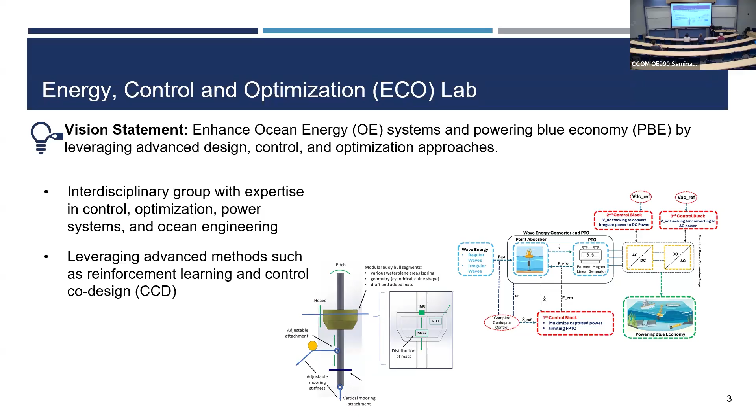That's an interdisciplinary group. We have different expertise from ocean engineering, electrical engineering, and mechanical engineering, and that's all we need for improving this kind of system. We're using advanced approaches like reinforcement learning, control co-design, and machine learning algorithms to solve the issues that we have with these kinds of systems.

If you're familiar with ocean energy systems or powering blue economy applications, you've probably seen these pictures, but for those who are new to this concept, we have a large amount of energy that can be harnessed from the ocean. It can include different types like wave, ocean currents, and ocean tidal energy. This amount of energy can power over 80% of the electrical demand from the US, so we're speaking about a large amount of energy accessible in the water.

One of the most important applications we can imagine for using this power is powering blue economy applications. Using this power is challenging because it's difficult to transfer it from the ocean to the shore, and there are discussions about that. But one of the most important applications we can target is using this power for applications we already have in the ocean, because we have the same issue transferring power from the shore to those applications.

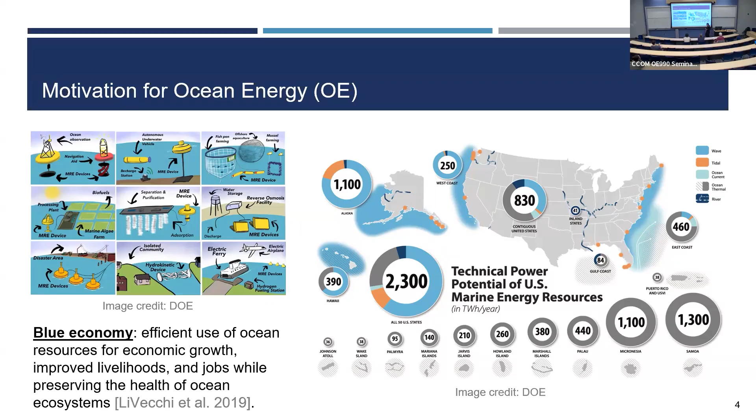So those applications include aquaculture farms, ocean observation, water desalination, and other applications that fall under powering blue economy applications, enabling sustainable use of the ocean. We want to target those specific applications and use the power we already have in the ocean to power them. So what are the current challenges that we have here?

For ocean energy systems, the first challenge is a very long and costly procedure for designing the system. To reach the optimal system, you can see from the history of other systems, like wind turbines, that it's a very long procedure to get an optimal design. So how can we make it more efficient? We have different ways—we can use control co-design, which is co-designing the control and the design of the system together, considering different parts together and using advanced approaches to get an efficient design.

So we already tested this in different systems, so we can just borrow those ideas and test this for the ocean energy systems. One of the issues for this system is the discussion on the unsuitability of these ocean energy systems for the final application.

By final application, we're targeting powering blue economy applications. So why don't we take one step back and see these applications from the beginning? When we want to design this system, applications like aquaculture farms are new in the US, so we can take one step back and see these applications.

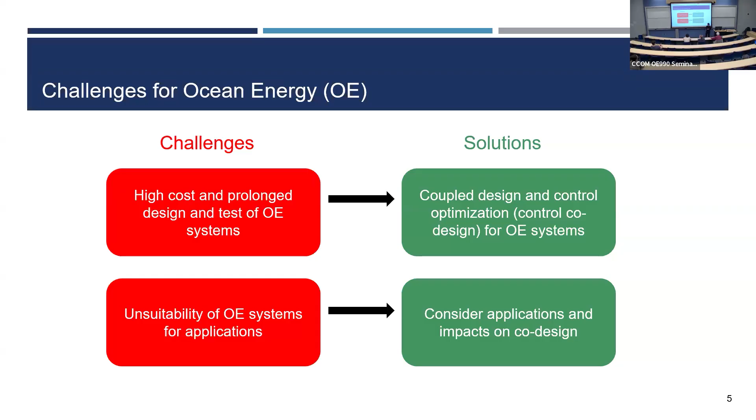So two main thrusts I want to cover in today's seminar. The first thrust would be control co-design for ocean energy systems, and I'll specifically speak about the marine current turbine and wave energy converter.

Thanks to a very nice figure from PNNL, the second thrust would be for PBE applications, specifically the aquaculture farm, and how to co-design the ocean energy systems with this application. Starting with the first one, the first question we need to answer is, what is control co-design?

To understand the concept of control co-design, we first need to understand the difference between control co-design and the traditional design that we already have for different systems.

In the traditional design, you can see that we start in a sequential process. We start from aerodynamics, mechanical design, electrical design, electronics, and finally control. So control would be the final step.

What happens if we have this procedure? The control should match all the features we have from the previous steps, so none of them would consider the requirements that control has. So what would be the solution for this?

We can consider all these steps together at the beginning. So we can consider control and design together at the beginning. And if we are considering the control requirements and the mechanical design together, it would be the interdisciplinary field that we're interested in.

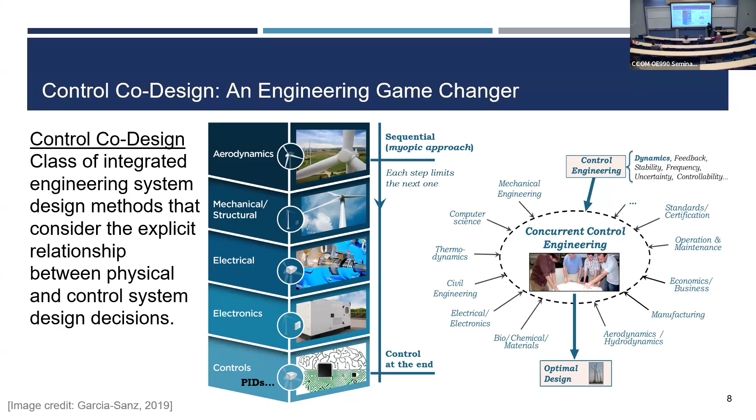This approach was first introduced and used for airplanes, so we just borrow that idea. It will be very suitable for electromechanical systems like wind turbines, marine hydrokinetic devices, and airborne wind energy systems are a good target for using this approach, because all of these systems are new systems.

So we can use this control co-design concept before going through prototyping and incurring so much cost and time, rather than getting back to the first step to improve the design. Doing this control co-design lets us see the improvement in the design at the beginning.

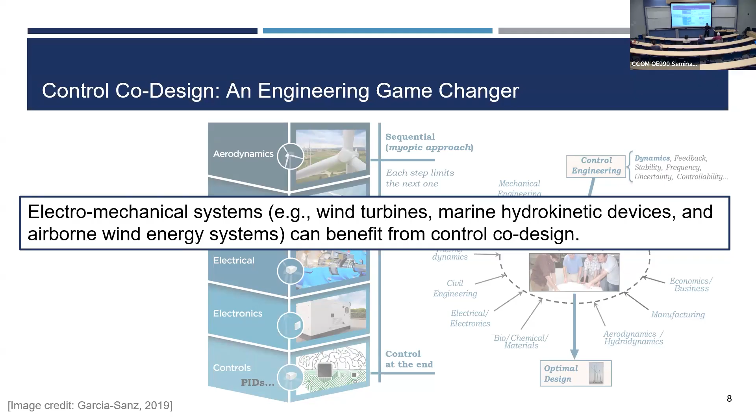So for any system, and here we're interested in ocean energy systems, what could be the major steps when we want to solve the control co-design problem? The first step is understanding what our system is.

It's very important with any new system that you're working with, you need to understand, identify the system, and know what the system is doing. The second step would be mechanical design.

It doesn't mean that you need to fully design the complete system, design the controller, and go to prototyping, but it means that we need to have a first, basic design for the system, because this basic design is what we use in the control co-design.

In the basic design, we need to consider low fidelity for the design. Why do we need this? Because we want to play with the design variables in the design and change these with the control requirements. The next step would be understanding what the control requirements are for our system.

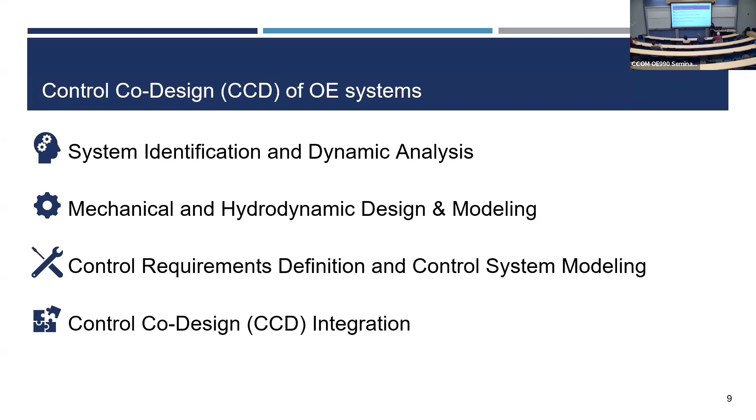Which control do we need for our system, and what are the main requirements for them? After that, we can couple these two together and target the control co-design. We are doing the control co-design, but for that, we need to know what would happen in the design of the system and in the control of the system. I'll first give you an example from my PhD.

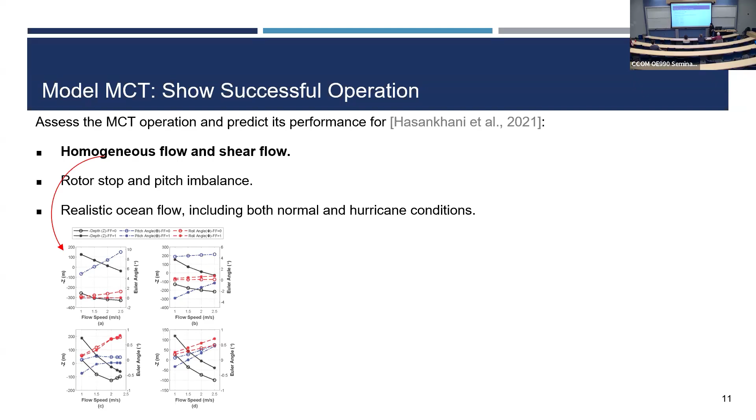The next part would be some faulty conditions. If we have the rotor stop, or pitch imbalance, what would happen to our system? Can our system resist these, or would something very unusual happen? We see that our system can resist these faults.

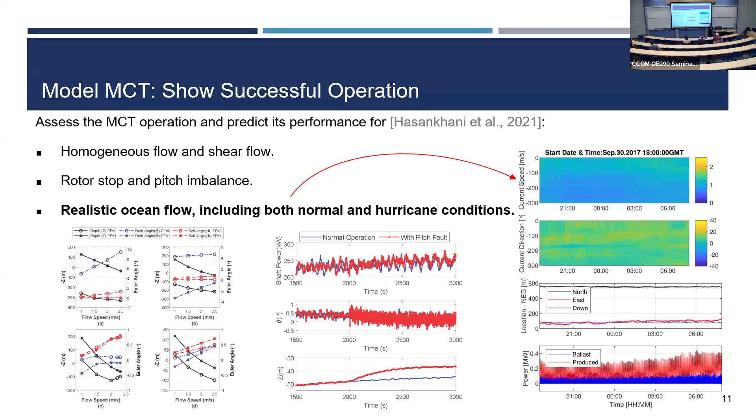And finally, seeing the operation of the system for real oceanic velocities—for normal conditions and hurricane conditions—seeing the power output from this system and the location of the system. So we understood that the first, basic design for this system is working very well in different conditions.

With this intro, we have a very detailed and nonlinear model for this system. If we want to use that complicated nonlinear model, I didn't show you the equations, but if you're interested, we can discuss that. So if we want to use that complicated model, we can do that, but we are targeting the control co-design.

Control co-design wants to place both the control and design of the system together. If we want to put both of them in a very detailed approach together, it would be very time consuming. So if we can linearize or simplify the design of the system or the control part, we can make this process faster.

So the first attempt at linearizing the system: we get the linear model for the vertical movement and the linear model for the power generation from the system. Then we justify those models against the nonlinear model and see that the precision is enough for our case.

For the linear model of net power, we have the net power from the system, which I already explained. We have the power production, coming from the ocean current velocity, and two terms for power consumption: power to hold the operating depth and power to change the operating depth. So we need to see the balance between these three terms to find the maximum power we can get from this system.

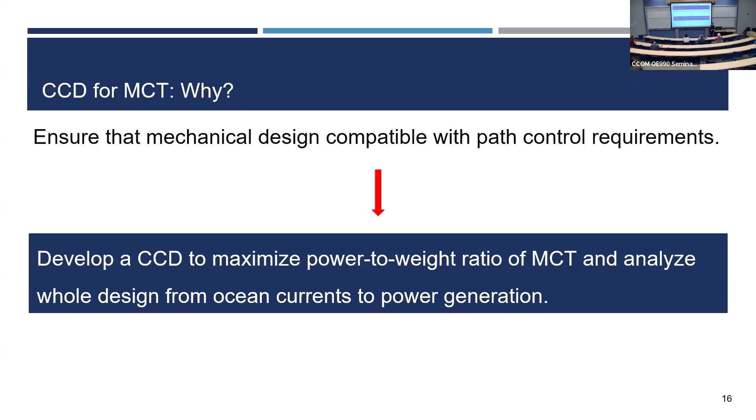Since the beginning, we designed a system that is capable of harnessing the maximum power while following those optimal paths. So we use the control co-design to design the system and see how this control co-design changed the basic design we had since the beginning.

For this, we can target changing different design variables in the system, but for my case I just targeted three: the rotor of the system, the buoyancy tank, and the generator. These are the three main design variables I targeted to see how changing them would change the design of the system, and how the power-to-weight ratio, which is our objective, would be affected.

So the rotor is very important for generating the power. The buoyancy tank size would define how much our system is moving in the vertical position, and then the generator shows us the rated power that we can get from this system.

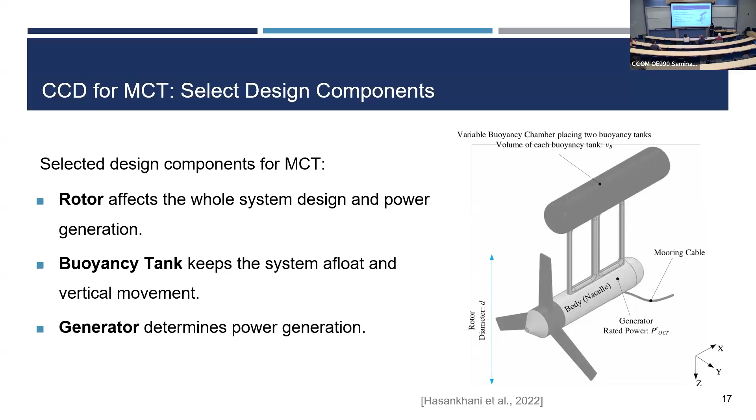So with this, just choosing these three variables, now we want to define the control co-design approach. The control co-design approach should oversee the objectives from the design of the system and then the objectives from the control of the system. So we have two levels here. We need to combine these two levels. How to combine these two levels? It's the art that we have here for the optimization.

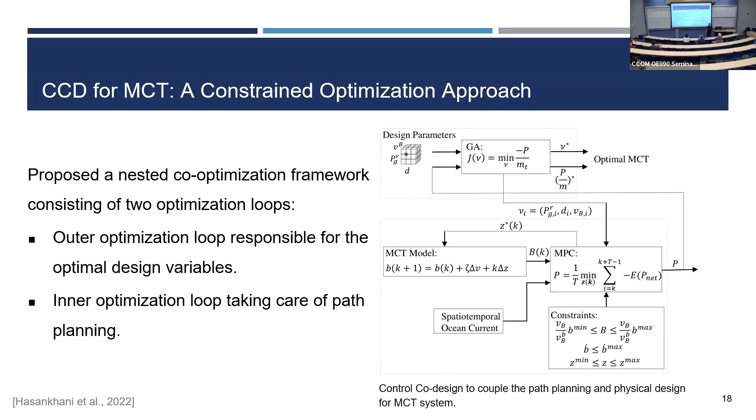In my problem, I define this framework to consider the outer optimization loop, which is for the design of the system, and then the inner optimization loop, which is for the path control of the system. So we are considering two different optimization loops. You are seeing that the problem is getting more and more complicated, and now you can see why we need to simplify the model wherever we can.

So the main problem for the outer optimization would be maximizing the power to weight ratio, while we already have the path control problem as the inner one. And then we are changing different design variables here, which are the rotor, generator, and variable buoyancy tank size. So the problem here is maximizing power to weight ratio, and we need to see if we are changing the rotor, generator, and variable buoyancy tank size, how the mass of the system would change. By changing all these parameters, how the mass would change, and we need to formulate them.

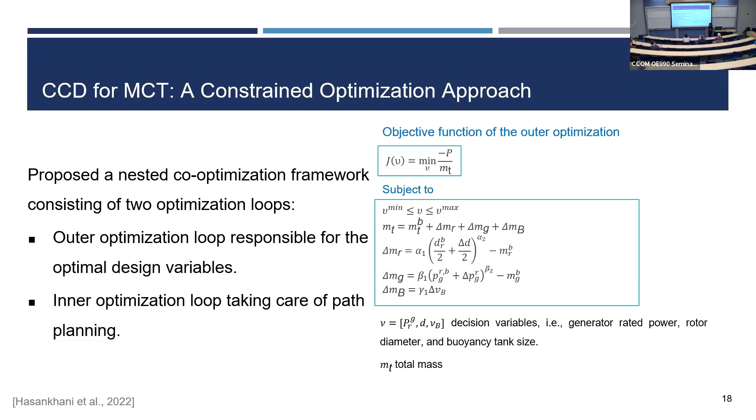So after formulating the problem, we want to see what results we get from here. The first case we show here is the base design. We only apply the path control to the base design that we have since the beginning, and we see what is the value for the power to weight ratio.

Then we tested this with sensitivity analysis. We understood that the rotor diameter is the dominant design variable here. So the second case is showing if we only target the control co-design for the rotor diameter, what would be the changes? You can see that the rotor diameter size is increased, and you are seeing around 16% increase in the power to weight ratio.

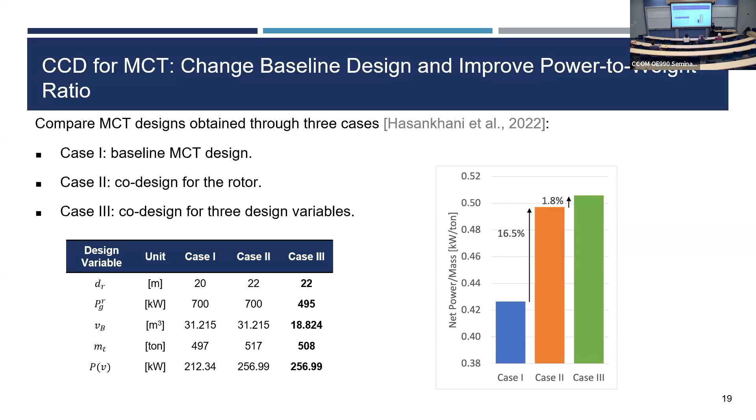And then the final case is changing all of the design variables, rotor diameter, generator size, and variable buoyancy tank size, and seeing how this impacts the power to weight ratio. You are seeing around 18% increase compared to the first case. Now we can understand how important it is to apply this control co-design approach for this kind of system before going through prototyping and before spending so much time and money on this system.

So with this intro, what is happening now in Ecolab? What is happening now in our lab? We are working on control co-design, coupled control, optimization, and design for the wave energy converter.

So again, we need to understand we are working right now with the point absorber type of wave energy converter. We need to first understand what these systems are doing, and then we need to understand another part for this system, which is power takeoff technologies to harness the power from these systems. And then we need to have the mechanical design with high fidelity because we want to play with them in the control co-design, and then understand the control requirements from the system.

For example, I show you here that for this system we need three control blocks. The first control block is for maximizing the capture power, and then limiting the force from the PTO, and then the two other blocks which are related to just controlling the power output from this system. So we need to consider these control requirements from the beginning in control co-design for this system.

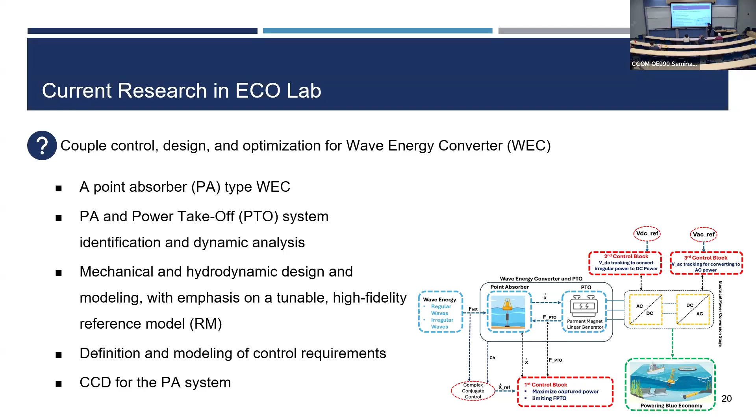So with this, I want to switch gears and go through the second thrust, which is co-design of ocean energy systems for powering blue economy applications, specifically aquaculture farms.

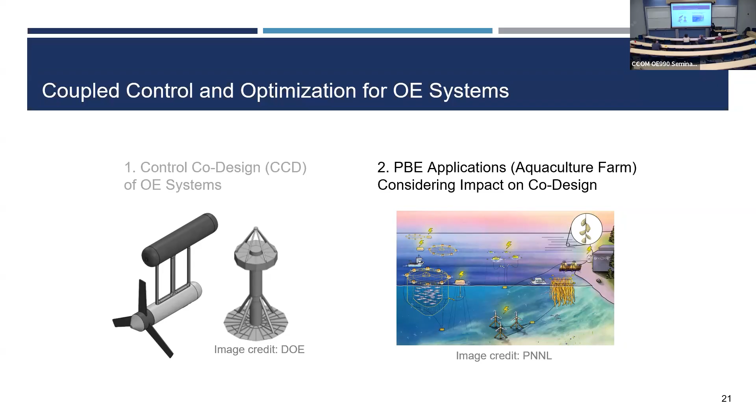So the first thing here is clarifying: is this system, a wave energy converter, a good option, and can it power the aquaculture farm? The first thing is we are going further offshore for the aquaculture farm because there is high competition in the near shore zones, and we want to avoid those competitions.

Also, by going further offshore, we can increase the amount of production from the aquaculture farm. The current energy need from the offshore aquaculture farm is met by diesel generator. You may ask, what is the energy demand from the aquaculture farm?

Here's an example. For lighting, for feeding, and for other applications, we need some power for the aquaculture farm. For this example aquaculture farm, we have around 2,800 megawatt hours for 10,000 units of fish production.

With this amount, we can get an initial guess and compare it with the annual energy production from a sample wave energy converter. Reference Model 3 is a well-known wave energy converter designed by the Department of Energy, and the targeted annual energy production for a specific location they evaluated was estimated around 700 megawatt hours.

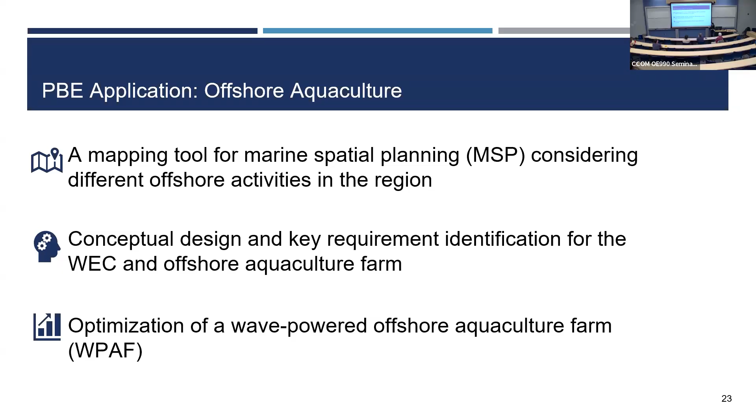And then, conceptual design of the system: what are the main requirements from the aquaculture farm, what are the main requirements from the wave energy converters? Because these are two separate systems, we need to combine them together. And finally, optimize the wave-powered offshore aquaculture farm together as a single system.

I'll give you some results from my postdoc research, and then go back to the research we are now doing in the ECO Lab. The first task, as mentioned, is to select the deployment location for the wave-powered aquaculture farm.

To do that, we need to consider different factors. The first one is environmental factors, important for both fish and the wave energy converter. We need to consider what's required for the fish: temperature, salinity, dissolved oxygen, and current speed, and what's required for the wave energy converter: significant wave height and wave energy period.

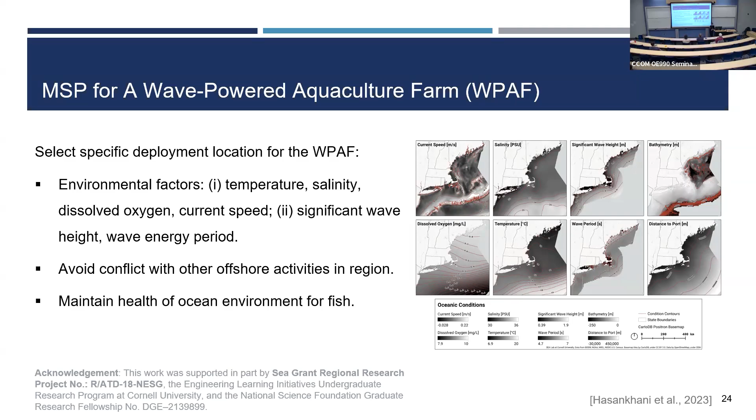We also want to avoid conflicts with other activities already happening in this area, and finally, we want to maintain the ocean health for the fish. So we want to place the aquaculture farm in a location where we're sure we can get production from.

After addressing the first part, the mapping tool and understanding what locations are available for this system, we want to start with the conceptual design. What are the main components for the system? We have two main components: wave energy converter and aquaculture farm.

So for the wave energy converter, what are our targets? We want minimum cost, high reliability, and because we're targeting the offshore aquaculture farm, we need a near constant power supply.

For the aquaculture farm, we again want minimum cost and maximum fish production from the system. So what are the components here? The wave energy converter needs us to consider the energy generated from the system, and we need to model the cost of the system.

For the aquaculture farm, we have net pen, feed barge, fish type, and carrying capacity. For the net pen, it's important to know the geometry of the system, because if we know the geometry we're designing, we want to see how the design would change, along with the materials we're using, the energy required, and the cost required for the net pen. For the feed barge, we need to know how much energy is required and what the cost is for the system.

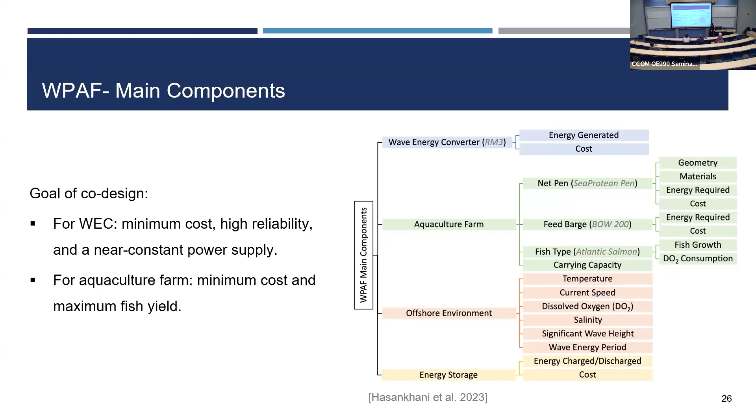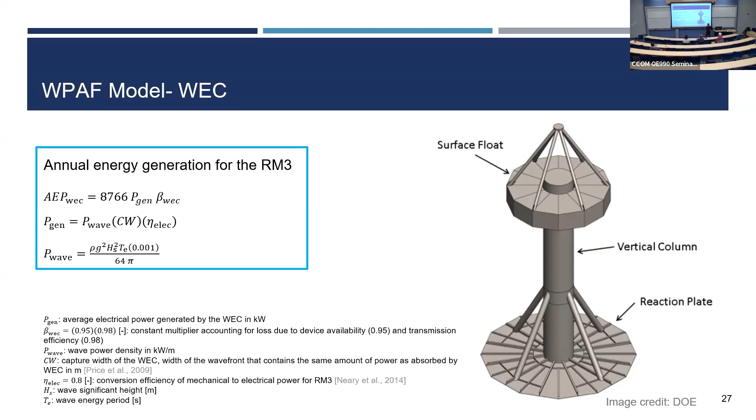So you already see we have a very complicated model here. We need to model different parts and see the relation, the coupling between these different parts together. Just to give you some ideas, I don't want to go over the equations in detail. The energy model for reference model 3 that we worked on previously gave us the annual energy production, the power generation based on the wave height and wave period that we have.

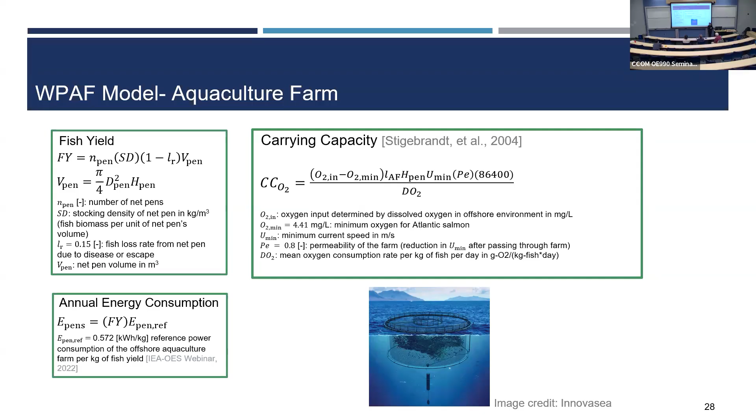For the net pens, we need to understand the fish yield for the system based on the stocking density we put in, what is the annual energy consumption, and what is the carrying capacity, which gives us the limit on the amount of fish we're putting in the system. After modeling all these components together—and I didn't go over the rest of the components since it's ongoing research—we need to model the objective function.

Again, we're solving an optimization problem, always solving an optimization problem—right now for minimizing the total cost of the system relative to fish yield, seeing what the cost is based on the fish yield we get from the system.

The constraints we considered in the first try were the power supply, making sure it's enough to power the aquaculture farm; the fish yield, making sure the amount of fish stays within the range of carrying capacity; and also putting some ranges on the net pen geometry.

With this, we have the design variables: the capture width for the wave energy converter, giving us some idea of the physical design of the system, and also the diameter and height of the aquaculture farm, and then the stocking density.

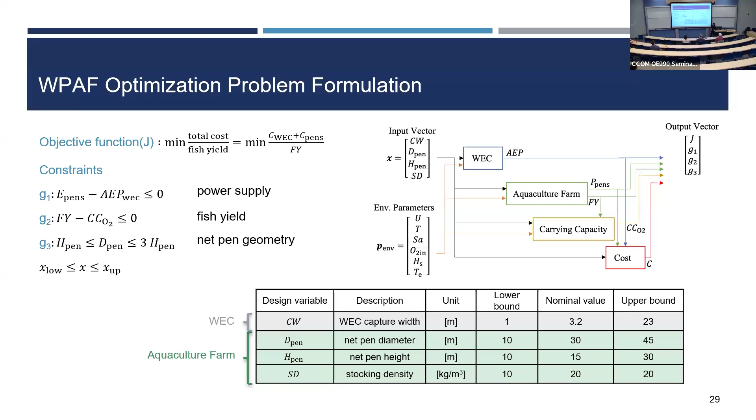These were the first trial results with this complicated model. So the first results we get from here—without going over too much detail—we understood that the optimal designs we expect from this system can differ, but all of them show that the capture width from the wave energy converter and the pen volume should have a ratio of 0.003. We also found an optimal stocking density of 20 kilograms of fish per volume.

And the optimal cost per fish yield was $6.4 per kilogram of fish. But this model was not complete because we didn't go over the details for all the components. It was only the first trial.

After seeing this, we understood that we need to go over the details for all the wave energy converters, all the energy storage system, to have better results and a better cost estimation. This is ongoing work. We are working on that to see what would be the complete model for the cost of this system, and comparing this cost with the cost from the diesel generator option that we have.

So it just highlights for us that we are required to optimize the design and location simultaneously, and also we need to have a detailed design from the wave energy converter and aquaculture farm together.

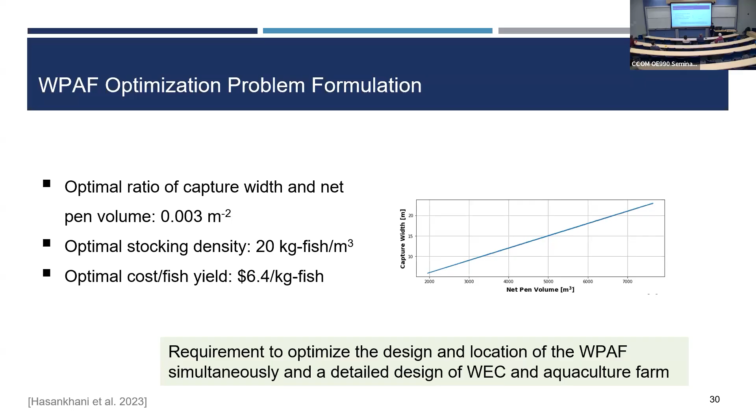So now what is happening in the ECO Lab? The second part: we need to design a wave energy converter reference model which can be useful. Now we know that we need a detailed design for the wave energy converter. So why don't we have a reference model wave energy converter targeted for PBE applications?

So this reference model needs to be high fidelity, so we can play with it and make it suitable for different PBE applications. Our first target is the offshore aquaculture farm application.

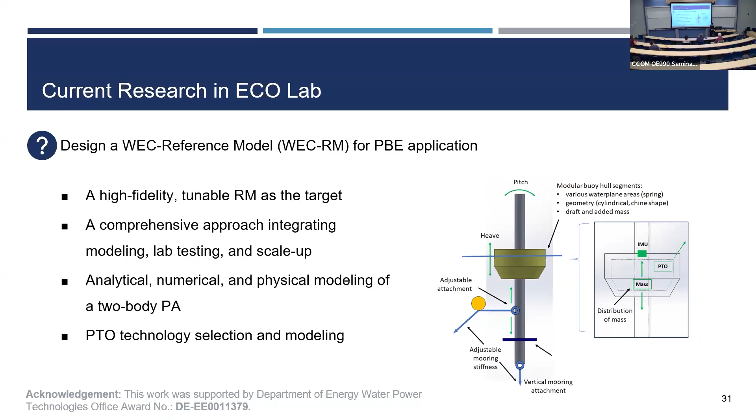So the PTO technology for these systems is very important, as I mentioned. We started with the two-body point absorber, and then we need to understand what are the power takeoff technologies for this system. To do this, we need to combine the simulation and the design for lab testing together.

With this high fidelity model, if we want to do the modeling, test it in the wave tank, and then go over to field testing, we see how this design changes and how we should justify this for the offshore aquaculture farm.

And all this information helps us understand how to design an optimal wave-powered aquaculture farm together.

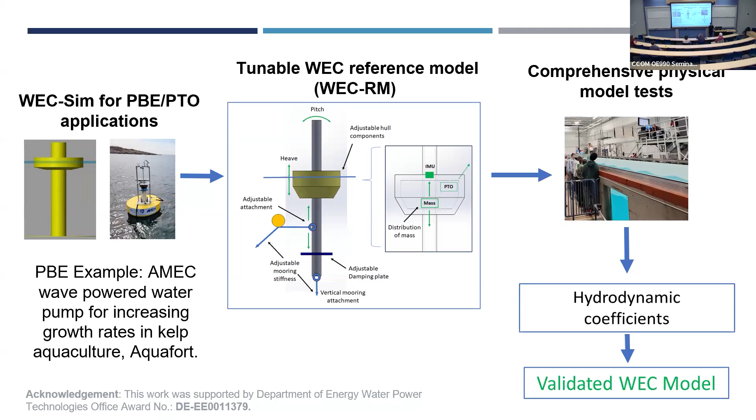So to give you some feeling on that and an intro to the research we are doing: the wave energy converter types we're having, because I didn't speak about this up to now, we are targeting point absorber, oscillating water column, and oscillating surge wave converter. And then we have 4 different types of power takeoff technologies.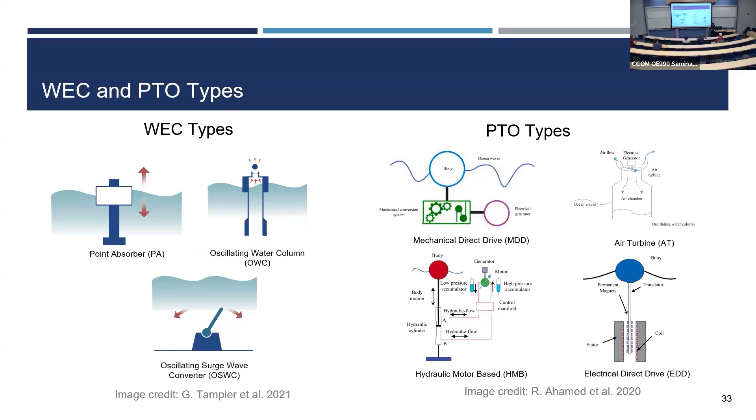For example, for the offshore aquaculture farm, we understand that the oscillating water column works very well with the AT PTO options. And we see that the point absorber is probably the best choice here, and it can work with mechanical direct drive, electrical direct drive, and hydraulic based systems.

When we want to choose them, we need to see the considerations we have: what is the efficiency for this system, what are the considerations here, and just choose the right system for our type.

And then the final choice is not good, because if we are speaking about the offshore aquaculture farm, if we are going further offshore, this option is not very well suited for our case.

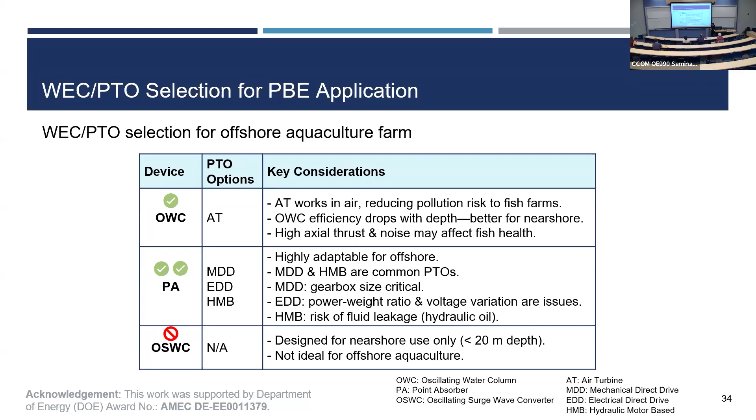So with this approach, what I have in mind and what I'm seeing as research for leveraging different control, optimization, and design perspectives is designing a toolbox for the ECO Lab, targeting different approaches for control, design, optimization, co-design, control co-design, and multidisciplinary optimization.

So do we need to use all of them always? No, it's up to the problem. You are already seeing two different problems: one was the design of the ocean energy system, and one was the design of the wave-powered aquaculture farm.

So we have different oceanic data here for the ocean current velocity, significant wave height, wave energy period, and any oceanic data that we have.

The quantifiable metrics - economic, security, technical, or environmental. And then the disciplines that we have - control, electrical, mechanical design, ocean engineering - any disciplines that we are interested in.

So then when we are targeting a specific problem, for example, we want to see the new optimal design for ocean energy systems, the wave energy converter, we need to just use control, design, and control co-design. This gives us the ability to have a good design for this system.

When we are targeting an existing system, the reference model three, and we want to improve the design of that one, control co-design and multidisciplinary design optimization can help us. When we are just considering the optimal array for the system, the optimization task would be enough, and they are very close to each other. We can use these approaches in different problems.

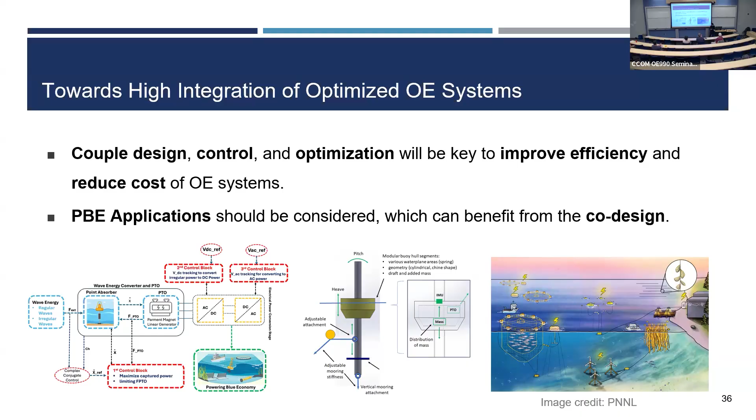For PBE applications, if we need to justify that these ocean energy systems are good for PBE applications, we need to take one step back and design the system specifically for those applications. So we need to use the co-design perspective and all the optimization techniques that we discussed. Thanks for your attention.

Thank you so much, that was really great. I'd like to open for questions if anyone has any questions for this speaker. One question I have is, for your model, how are you obtaining information about the wave velocities, and how much noise is creeping into that model that could affect the control system, and how you deal with that.

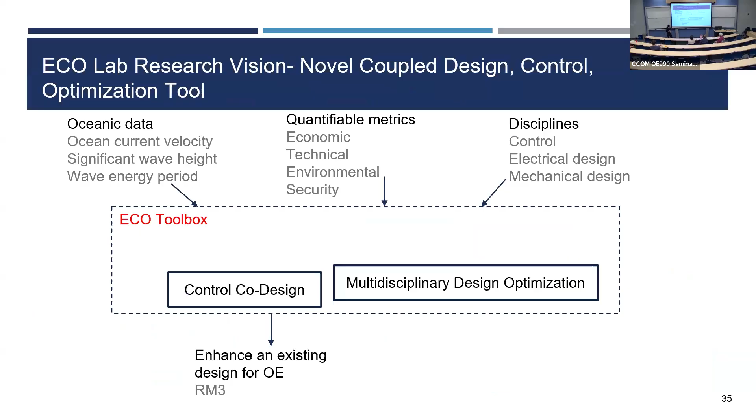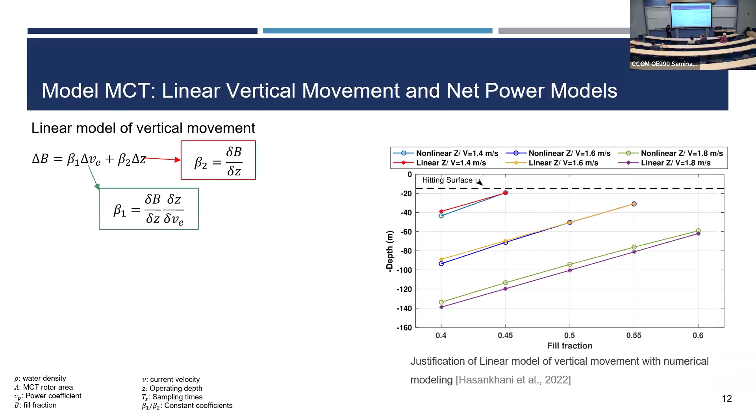Yeah, so you are - slide 13, 13 or 12? Yeah, this one - there, this one. It was the one with your original work that you did. Yeah, that one, this one?

Yeah, so it was the measurement that we have for the Florida Gulf Stream, real measurement. So for getting this data, the data is key for doing this kind of research. You need the real data, and here at UNH we have this data. So you can use that data for your research. But if you don't have that data, it would be very difficult to do that research.

And I didn't work on the noise of this system, but it's also another aspect, another discipline that we can add to this system - to see if we are considering the noise, what would be the impact on the ocean, on any fishes, anything like this.

Yes, nice animation, thanks Arezoo. What is the timescale? It's hour. Just, that's 1 hour from left to right? No, it's not 1 hour, it's just an hourly scale for that one, but I don't put it here.

I believe that it's because the time is changing - moving just with the time. How fast the currents are changing, I don't have this on top of my mind, but I can check that for you. But the time steps that we considered were hourly time steps, and it was not changing so fast. It looks like days to me, like 12 hours to days, where you're seeing that variability. Yeah, so all of this would be around 24 hours - the range of this would be 24 hours, but it's the window that is moving, so it's just showing you maybe 48 hours. So it adjusts relatively slowly. Yeah.

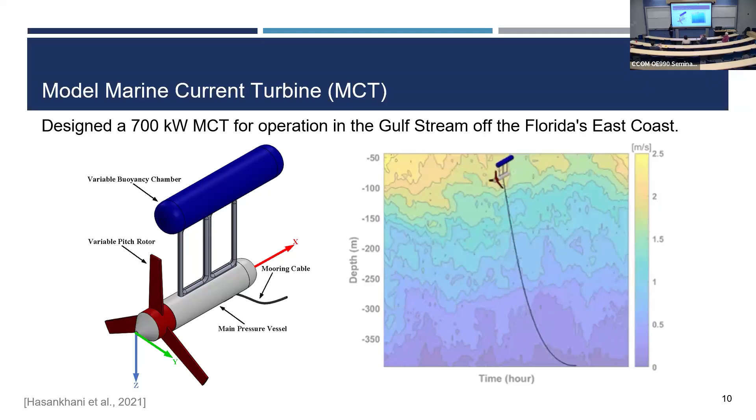Since we're here, can you go to slide 13, I think that's when you talked about the reinforcement learning?

This one. No, one more. Yes, that one. So I don't think I understood very well.

So you're using reinforcement learning for path planning in the simulations with the currents, and then PI control for the path following, MPC. That's you calculate the path planning with reinforcement learning, and then the actuators try to keep it within that path with the PI controller.

Yeah, if you want to, just keep going. That's a good question. So you're asking about this one, the relation between these two. The path planning, I tried different approaches.

For the path planning, I tried MPC and reinforcement learning. Reinforcement learning was working very well because these ocean current velocity data are uncertain. And then for the path tracking controller, I tried MPC and compared it with just the PI controller. I also tried reinforcement learning, but it's not very good for the path tracking controller because for controlling the actuators, the problem does not have that much uncertainty to justify using reinforcement learning. So MPC or even just the PI controller works very well.

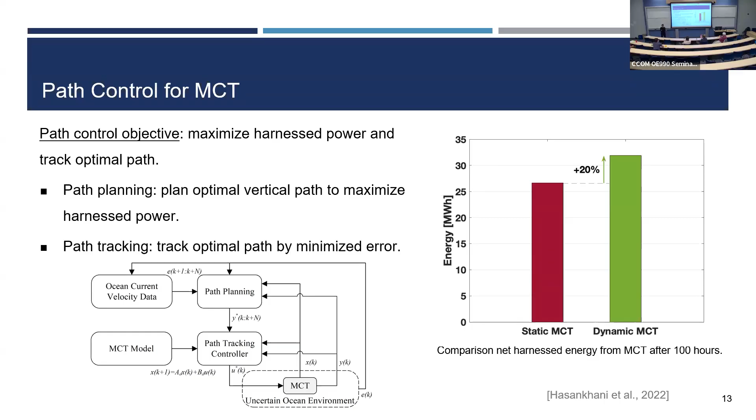So we're just maximizing the harnessed power and considering one horizon for the system. The difference between them is how to solve the problem. For reinforcement learning, we are defining the environment, the states, the actions for the system. For model predictive control, it's easier because it's similar to the traditional control problem. We give this problem to that one, defining the constraints and the variables, and then finding out what is the optimal path that we get.

So you're practically adjusting which parameter then? Are you adjusting just like the Z and B, or are you adjusting your error rate for the output component? No, we are getting the value, so it's called economic model predictive control. We are just going to do, it's similar to optimization.

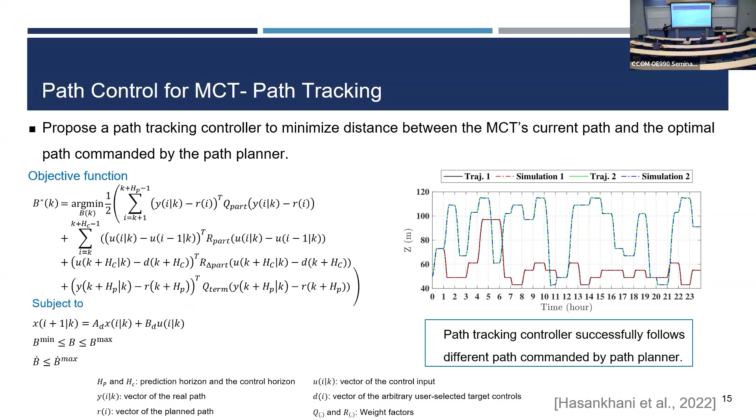So the next one, the model that you are saying is similar to this one. It's for modeling, it's the original and traditional way of model predictive control, for minimizing the error. For this one, it's usually more close to the optimization, so we want to understand what is the optimal path here. Thank you.

Any more questions? So this might be a really dumb question, but you started talking about optimal costs in dollars per kilogram of fish. Where do you want to be to make that an improvement over what farmers do now? What is the kilograms per fish that you're shooting for? Dollars per kilogram fish, I mean.

So you mean, in a practical sense, where are we headed with that? How close are we to getting there? Yeah, exactly. So that's a very good question.

The number that we get from the farmers, it's changing a lot. I remember this from about 1.5 years ago, it was around $6 per kilogram, so we were close to that one. But again, this number that I reported here is not from a detailed cost model. The detailed cost model probably increases this value, and then again we have some increase in the value of the fish. But for that specific number, the market value was $6, so we were close to that one. Okay, yeah, thank you.